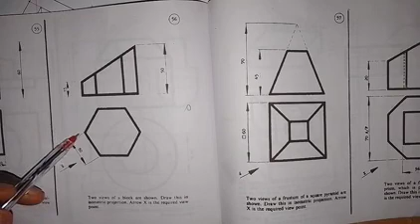and in the plan here we have the length of side to be 30 millimeters, and distance from here to here is 50, and distance from here to here is 15 millimeters. So we are going to put these dimensions together to get the isometric view of this object. So let's go and see how this problem can be solved.

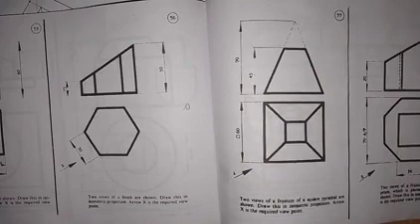Because this is an isometric object, we are asked to construct this isometric object with the views that we are given, and the views are given in first angle orthographic projection. Okay, so what we need to do first is construct a hexagon. That's the first thing that we need to do. So I'm going to construct the hexagon here.

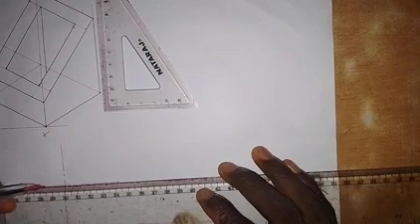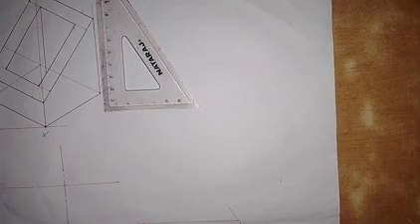Okay, so we draw this line. The length of side is 30 millimeters. It means that the diameter of the circle on which the hexagon will be constructed is 60 millimeters. So just look at what I'm going to do. I need to put my pen in the compass, and I'm going to take a measurement of 30 millimeters with this compass. So this is 30 millimeters.

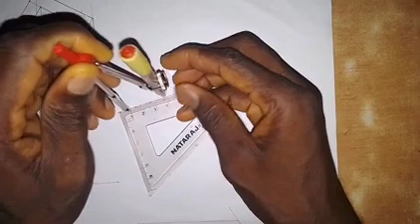Okay, so this is 30 millimeters. So I'm going to draw a circle like this. Then with the pinpoint of my compass at this point, I will draw an arc up and down here, and I'll also draw an arc up and down the circle here on this side.

Then I'm going to connect this point together with this. And I'll also connect this point together with this. Then I'm connecting this point together. So just pay attention to what I'm doing. Okay, so connecting this point, then I'll connect these 2 points together like this. Then I'll connect these 2 points together like this.

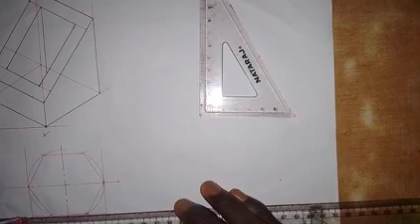The next thing I'm going to do is construct a square around this shape. So we'll draw a vertical line here, and coming to this side I will draw a vertical line like this. Then I will draw a horizontal line through this point, and through this point also I will draw a horizontal line like this. Okay, so I created, I think, a square.

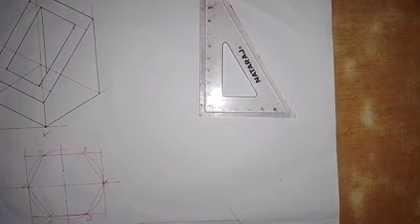Alright, so we are going to label these points. This is point P, and this is point Q, this is point R, this is point S, this is point T, and this is point U here. Alright, as we are told in the question, the viewpoint should be in the direction of arrow X here.

Okay, so what we need to do first is create a square, and that square has a length of 60 millimeters. If I check this, this should be 60 millimeters. You can see this is 60 millimeters, and if I check this also, it should be okay. Alright, so this one is not up to 60 millimeters.

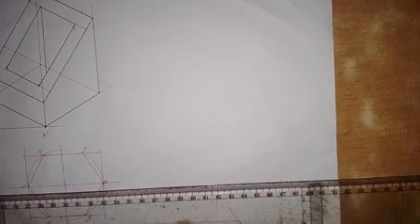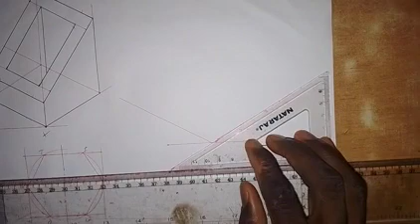So what we need to do now is draw a short horizontal line here, and then with my 30° set square, I'm going to draw a line in this direction, and I will also draw a line in this direction, like this. Okay, so now with the direction of view, what we need to do first.

Before I go on, we take this distance from here to here. Let me label this so that we can get it. So let's say this point is point A, this point is point B, this point here is point C, and this point is point D.

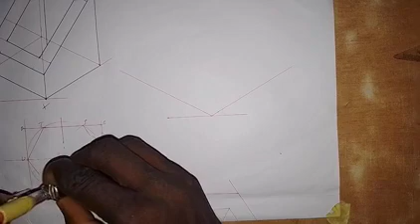Okay, so we take this distance AB like this. We take it from here to here, and we put it at this point, so we make an arc here. So if you look at what we have here, this is point A and this is point B. Okay, then I will take distance AD.

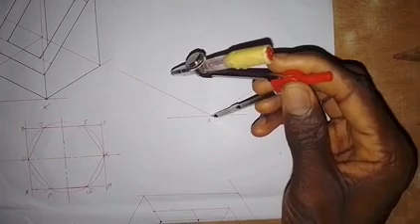I will take distance AD like this. Okay, so I believe you can see it. So I will take distance AD, from A to D. I will take this distance. Okay, so putting it at point A here, I make an arc here on the line. So now I'm going to transfer this point.

So what I need to do is to draw this line in this direction, and then with my set square like this at point B, I will transfer this point. Okay, so the next thing I'm going to do is locate this midpoint, that is point U here, and I need to locate point R here. So let me first of all label this. This is point C and this is point D.

So now let's locate points U and R. I will put the pinpoint of my compass here at A and extend it to point U like this. Then I can put it at D or at A, so make an arc here, and I can put it here again and make an arc here. Alright, so this is point U and this is point R. So just follow me the way I'm doing it here.

Now we need to locate points P, Q and S, T. So to get point P and Q, if you look at it, distance AP is the same as distance BQ, and also distance CS and distance DT. So I just need to take one of them. I just take distance AP like this.

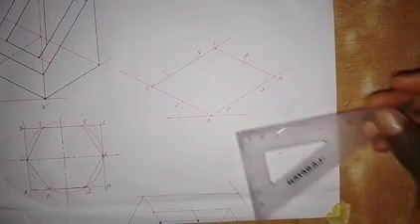So all I need to do now is to connect these points together. As we have here, P is joined with U. I connect P and U together like this, and also I will connect UT together like this. Then I will connect RS together, though it's not everything that we show. Then I will connect QR together like this. Okay, so this is the base that we need.

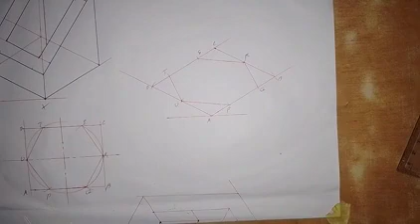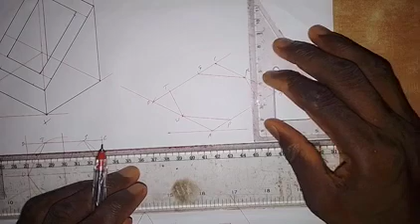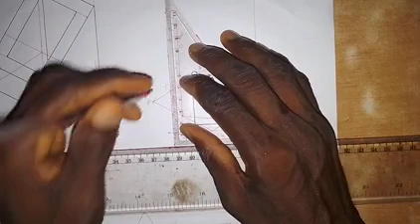So what I'm going to do now is draw vertical lines. At point Q here, I will draw a vertical line like this. Also at point P, I will draw a vertical line. At point U, I will draw a vertical line. Then at point T, I will draw a vertical line like this. Alright, let me also draw a vertical line at point S here, and also at point R.

Alright, so looking at what we have here now, with what we are given, on these three lines, that is the vertical lines at Q, R, and S, I will take a measurement of 50 millimeters. So this is 50 millimeters, and here also we have 50 millimeters. And here I will also take a measurement of 50 millimeters.

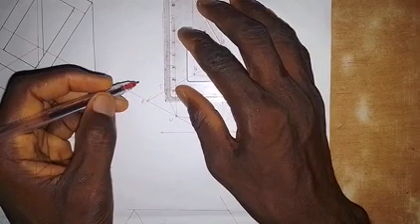While for here I will take a measurement of 15 millimeters from P up. This is 15 millimeters. Then on this line also I will take a measurement of 15 millimeters. And here also I will take a measurement of 15 millimeters up. So this is 15 millimeters.

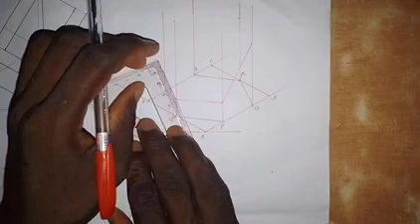So with what we have here, I'm going to connect these points together. I'll connect these 2 points together like this. Also, I will connect these 2 points together. Then I'll connect these 2 points together. Also, I'll connect these 2 points together like this. Then these 2 points, I will connect them together.

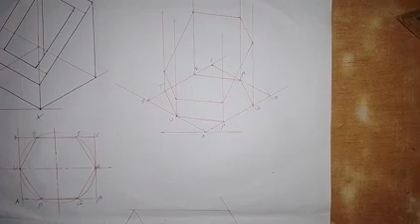Alright, so the next thing we are going to do is to bring out the visible outlines of this object. I'm going to pause the video and do that. Alright, so this is the isometric view of the object as we are asked to do it. It's just a solid truncated hexagonal prism, and that is what we have done here. So all you need to do is to practice. When you practice, you become a master at it.